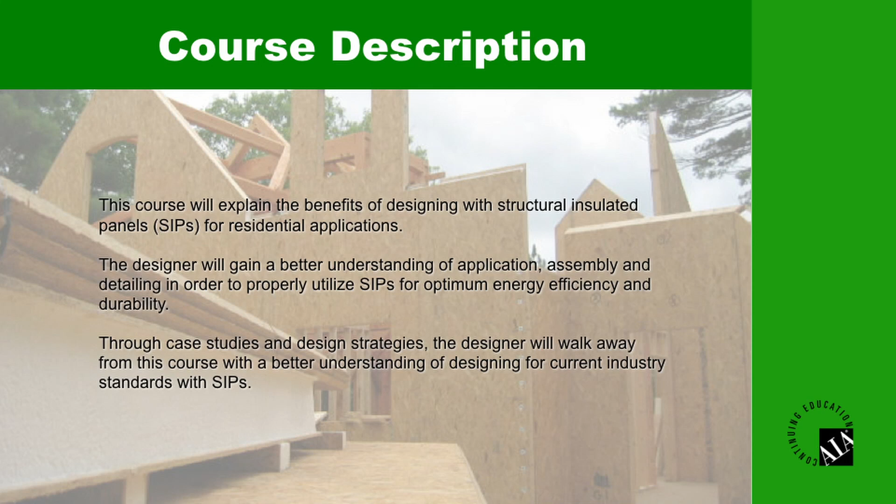The course description is basically an outline of SIPs, how they're used, what is a SIP, and how a designer can gain a better understanding of the utilization of SIPs, some of the detailing that goes into it, how they are used in assemblies, and how we use SIPs to provide optimal energy efficiency. And of course, we'll talk about durability, one of the factors in SIPs that's very important when we make a very tight envelope. We also want to look at the building science and the durability aspects of a structural insulated panel envelope. We'll walk through a couple of case studies, look at some design strategies, and along the way we'll throw some words of wisdom your way to hopefully make you a better architect or designer as it relates to SIPs.

At the completion of this course, we would like to think that you will be able to describe and define what a structural insulated panel is and how it can be used in residential applications, understand the energy efficiency aspects, the strategies that are used in order to get maximum efficiency when using a SIP, also be able to illustrate and understand the design and engineering methods used to work with the overall design methods of building with SIPs, and of course list some of the current industry assembly standards.

The course outline is as follows. Roughly, we're going to talk about the basics of SIPs, what a SIP really is and what makes up a structural insulated panel. We'll go through some various applications. We're going to talk quite a bit about the energy efficiency and the green building aspect of a SIP. Then we'll break out into designing with SIPs and the engineering of SIPs and some of the tools that we use to better help understand the engineering of working with SIPs through a design. We'll talk about SIP manufacturing, and then we'll go into SIP construction as well.

So what is a SIP? Well, we hear that a lot. What exactly is a structural insulated panel? It's pretty simple. It's a composite structure made up of basically 3 elements. It's going to be a foam core.

The foam core in the industry, in North America, is predominantly expanded polystyrene, or known as EPS. Some people refer to it as the white board, also known as bead board. It comes in a variety of densities, but EPS is the standard. Next is XPS, or extruded polystyrene, most often known as styrofoam. It's typically colored, could be green, pink, or blue foam, and has a slightly higher density in terms of its core foam density. Lastly, it could be made up of polyurethane.

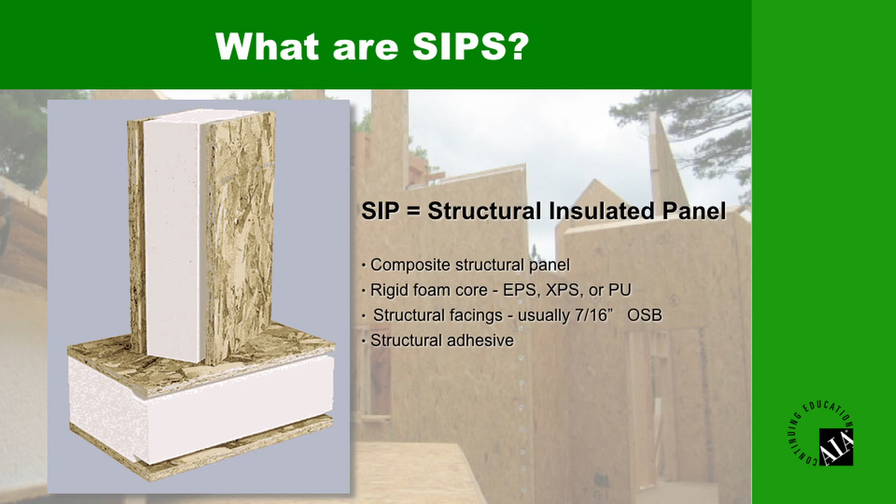So now that you understand basically what a SIP is, where did they come from? Originally they were developed back in the laboratories of Madison, Wisconsin. The Forest Products Laboratory first developed these back in the 1930s, and they referred to them as stress skin panels. The reason was looking at the use of our nation's most abundant natural resource, wood, and the concern was: is there a better methodology that allows improved efficiency when using wood?

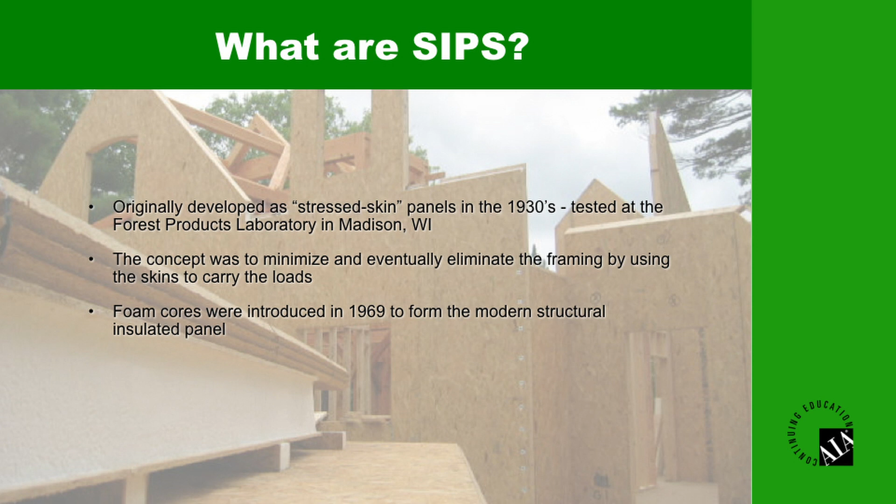They came up with things like sheathing, plywood sheathing, and now the oriented strand board. That material, when utilized in a stress skin panel as it was referred to back then, could be laminated and was shown or proven to have great strength in carrying loads. Today, the foam cores, which were introduced in the late 60s, now make up the modern structural insulated panel as we know it today.

So this is what we have when we look at the SIPs of today. We have the rigid foam core, we have a 7/16 OSB skin - though let's not say it's always going to be 7/16, we can vary from that, you can go to a greater thickness and achieve even greater structural load carrying capabilities. Then you have the structural adhesive, which bonds the core to the skin of the panel and makes it one solid composite panel.

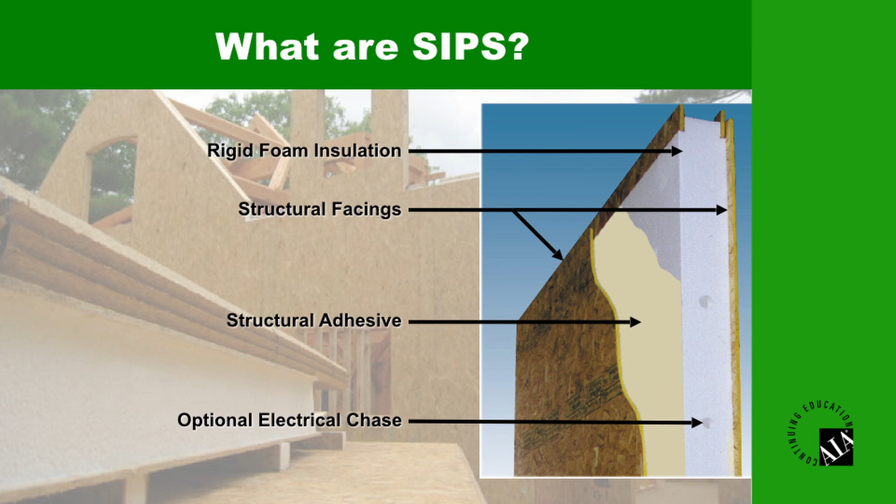And lastly, we have optional electrical chases. These chases are included in the core of the panel by many manufacturers, and they do this to allow a much quicker and simpler methodology when it comes to rough-in wiring of the SIPs.

The standard structural insulated panel does in fact use oriented strand board, but that doesn't mean it's the only panel out there. You have other options. One found quite frequently is a metal skin panel. Predominantly the metal skin panel is used in the refrigeration industry. It is not one that is predominantly used for carrying gravity loads - it's typically a cladding attached to some type of steel structure. It's much more commonly used in commercial structures.

It's very common in Europe. In the US, predominantly the only place you'll see it is in warehouses, refrigerator warehouses, or refrigerated freezer commercial spaces.

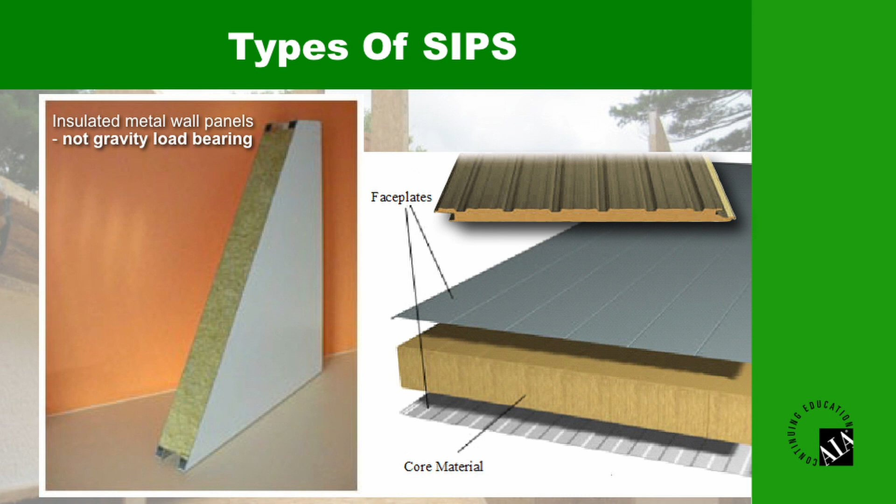Other types of skins include cementitious skins. In this case, we have a cement skin laminated to either side. This skin has both pros and cons. Pros, of course, is that it is not wood, so it doesn't have any moisture concerns whatsoever, or perhaps termite concerns. Also, those attributes could be applied to metal skins as well.

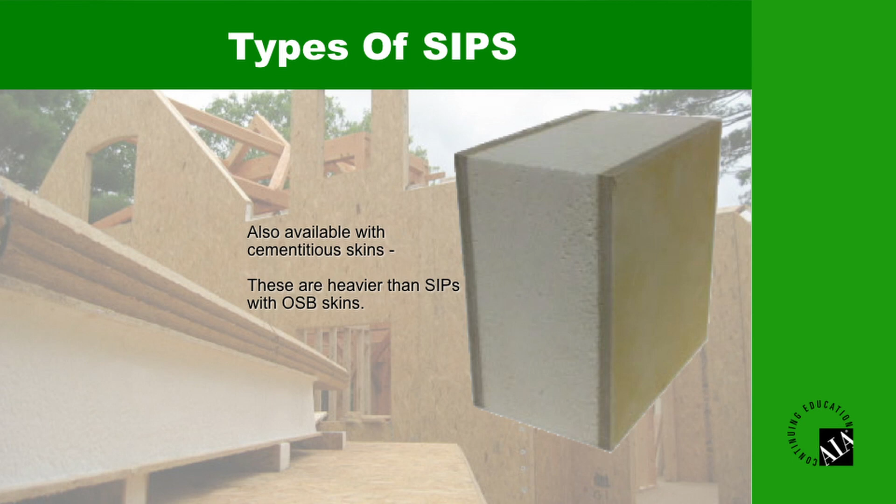But the disadvantages are: one, it doesn't have nearly as much code or testing approval. It's very heavy, as well as more difficult to fabricate and work with in the field. Also, the largest skin provided in the market today is typically going to be only up to about 4 by 10 feet. So it knocks you out of the ability to design using jumbo panels, the panels that cover a lot of area very quickly, which is one of the things in speed of installation we enjoy when using jumbo panels.

When we look at SIPs, we are looking at a foam core panel that's laminated. We are not referring to a SIP as one that is prefabricated or has a stud wall that has been pre-insulated - that's not a SIP. SIPs do, however, replace traditional stud walls. They are structural by nature, so therefore there are no studs. Think of it as nothing but a foam core panel carrying all your gravity loads around the entirety, typically, of the exterior envelope. They provide a much higher R-value, and they are substantially stronger than traditionally stick-built walls.

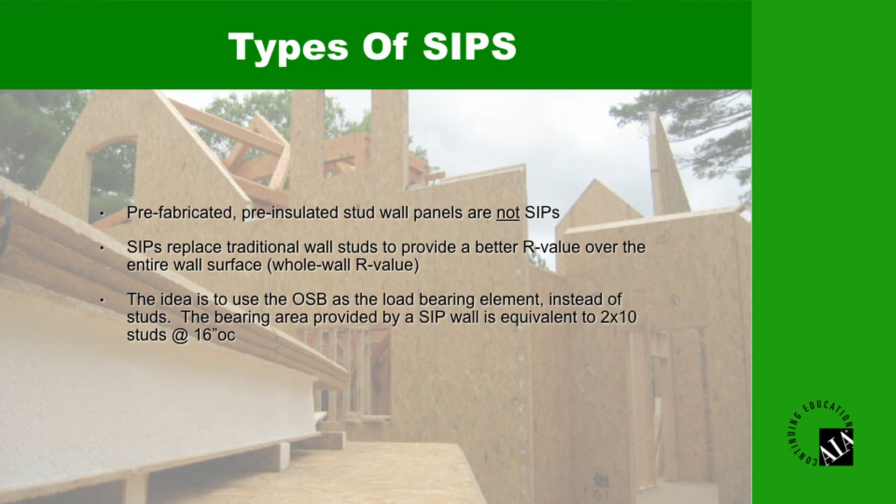The idea is using OSB as the load-bearing element - not necessarily load-carrying, but load-bearing - the equivalent of a 2 by 10 stud wall, 16 inches on center.

Let's talk about some SIP details. This is a critical moment because we need to fully understand that as a designer, you have a number of options when it comes to in-plane joint configurations or in-plane joint details.

Now what we have is an assembly, whether it be wall or roof, where the foam core is not interrupted. Therefore, we have minimal thermal bridging. When using this type of detail, the panel is doing all the work, handling all the transverse loads without the benefit of any lumber being used at the spline.

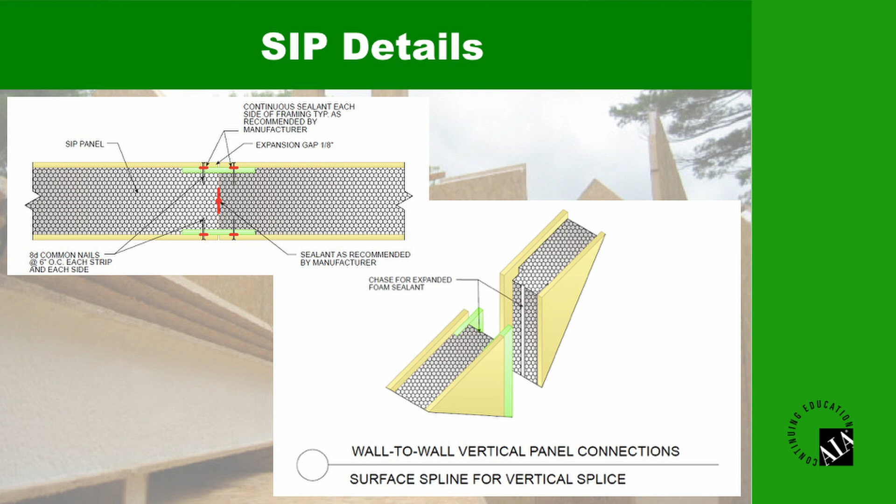Once the panels come together in the field, they are sealed, whether it be some type of a mastic or a foam, which we'll talk about a little bit later. In addition, SIP tape may be applied to the warm side of the assembly as code requires or as climatic conditions require.

This detail is very similar to the previous one, the surface spline, but in this case it's referred to as the block spline. If we think about that little section right at the joint of the panel, instead of providing two separate 7/16 OSB splines, we take those two splines and laminate them to a little block of foam, creating what might be referred to as a mini SIP.

That SIP, also known as a block spline or in some cases a super spline, slides into the edge of each panel, and when it comes together and is sealed, you have in essence the exact same configuration of strength and thermal performance that you would see in the surface spline.

The reason one might use one over the other is strictly a case of manufacturing processes. Manufacturers may have equipment that better allows them to use block splines, or routing tools that better allow them to efficiently create panel edge treatments that receive single or double surface splines. It's just a manufacturing situation, that's not the important point.

The important point is that this type of joint allows the panel to do all the work, and it minimizes the thermal bridging within the panel.

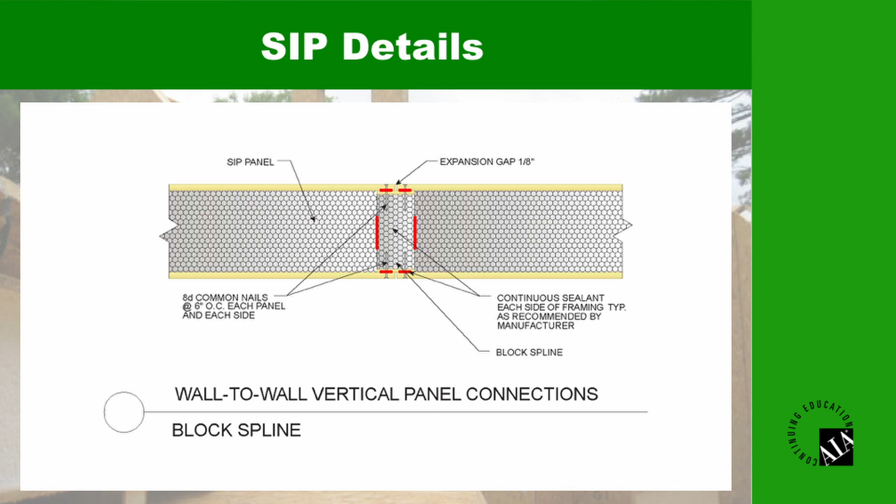On this detail, you'll see that the foam from the panel on the left and the foam on the panel on the right do not come together. Instead, we are dealing with a thermal bridge. That thermal bridge is double-dimensional lumber. The advantage of this double-dimensional lumber is that it increases the span capacity of a panel for a given thickness.

If we have a span condition where we need to increase its load carrying capacity, we have two options. We can go with a thicker panel, because thicker panels span greater distances, or we can change the joint configuration so that it has lumber in it, and that lumber adds to the span capacity of that panel.

After this lumber goes together, you still have to seal it. You can very quickly see that the joint in the panels and the joint in the lumber actually line up, so we are relying on that continuous sealant right at that joint to maintain its airtight boundary.

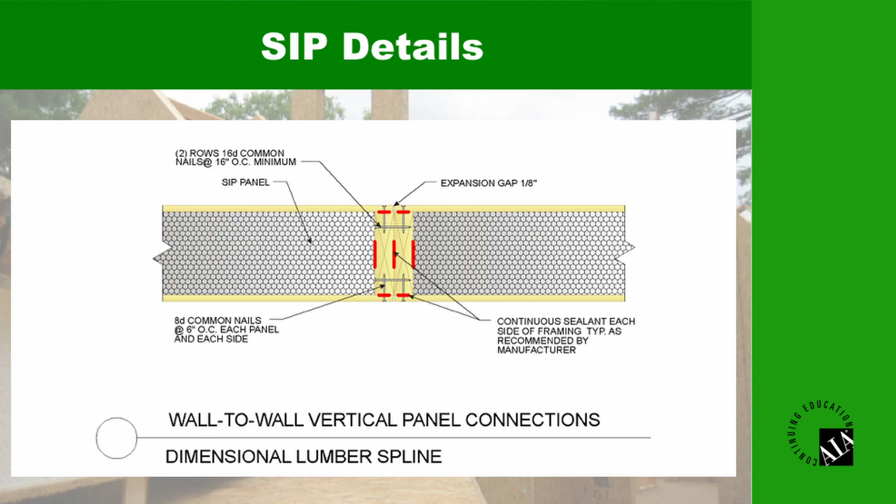This is also where we might employ SIP tape, a tape that ensures an airtight boundary or an air boundary on the warm side of the structure, acting as a vapor barrier.

In this plan view detail, we have two panels coming together at a corner, a 90-degree corner. One panel is long, one is short. This is a standard lapped connection, and the panels are brought together and fastened with a typical panel screw, perhaps at 24 inches on center as it comes up the wall corner.

Those screws penetrate through the long panel, or the top panel in this diagram, and into the lumber that is in the edge of the lower panel. The joint that is critical in terms of air sealing, of course, is the interface between the two panels, where sealant needs to be applied continuously so that we don't get any air coming through that corner joint.

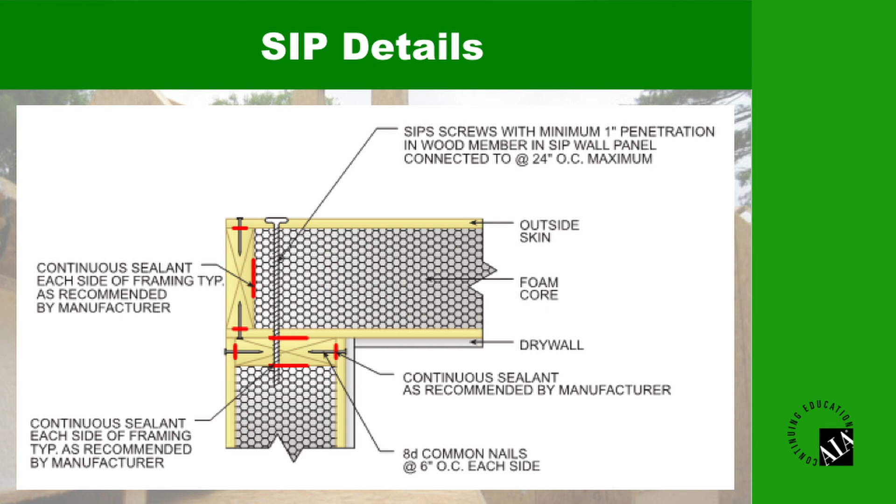As a designer, of course, you want to put windows and doors into the wall assembly. When using structural insulated panels, this is not only easy to do, in some cases it's really fun to do, because we don't always need to install separate structural headers.

The panels are structural and therefore they can act in some cases as their own header. If we don't have a point load, and the windows or doors are not too wide or too close to the top of the panel, this allows us to do exactly what you see in the photo, which is to put single dimensional lumber around the perimeter of the opening.

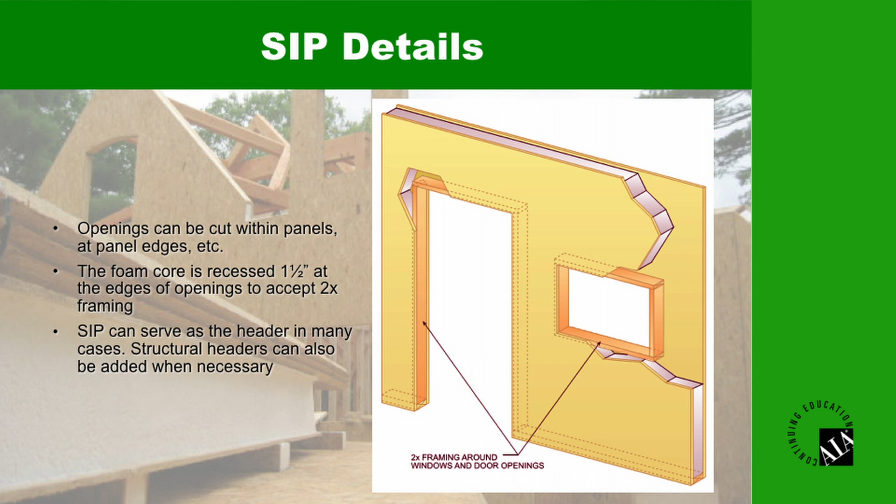This is done by recessing the foam 1.5 inches. That foam relief then allows the dimensional lumber to be sealed in place between the skins and nailed off on both sides. Fastening is typically done with standard nails or staples on 6 inches on center.

This next detail shows a typical hanging or hung floor system between a first and second floor. In this case, a top mount floor hanger goes over the top of the first floor wall. The floor joists stay inside the insulating envelope. The 3/4 inch tongue and groove floor sheathing goes over both the floor joist and the first floor wall panels. We increase our diaphragm strength tremendously by doing this, and then we stack the second floor wall panels directly on top of that. All of the red marks on the detailed drawings indicate sealant to maintain airtight integrity.

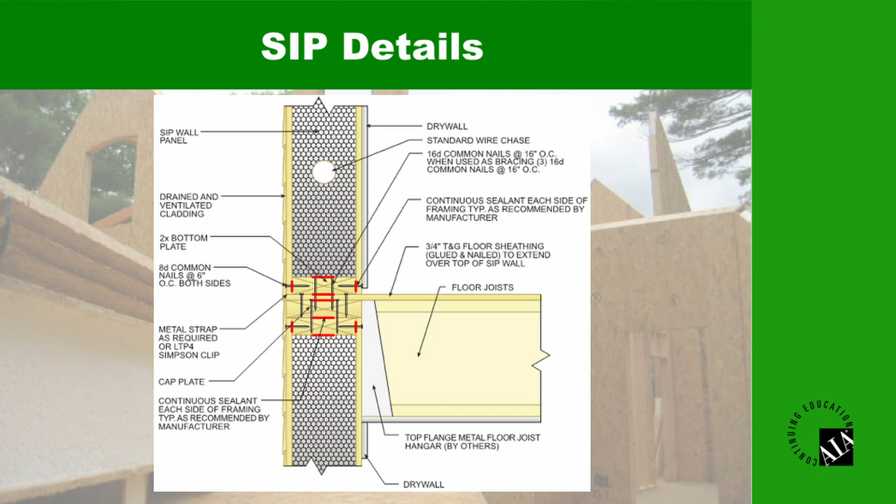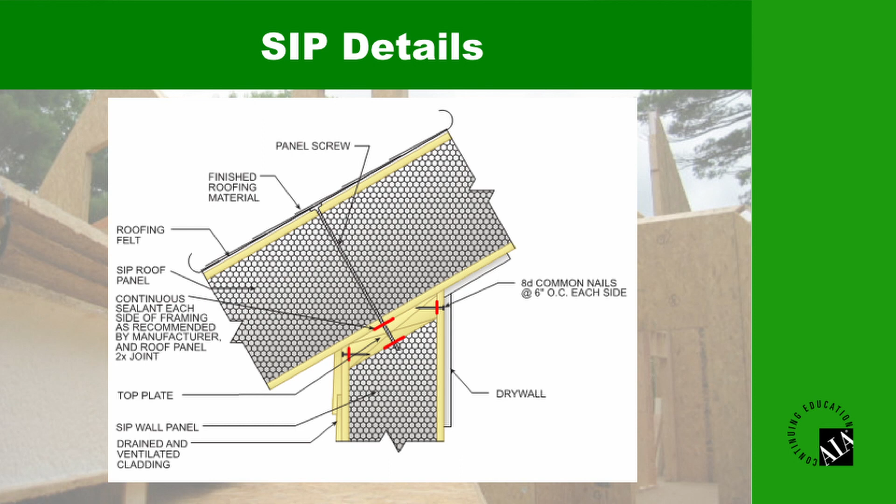Here's the detail of the connection between roof and wall. In this case, the wall panel has been fabricated to the angle which matches the roof pitch. The double dimensional lumber has been beveled on both sides, slipping into the top of the wall panel. Sealant is applied to the top of that wall panel before the roof panel drops into place, and then a panel screw extends through the roof panel and penetrates fully into the dimensional lumber that is the top plate of the wall panel below.

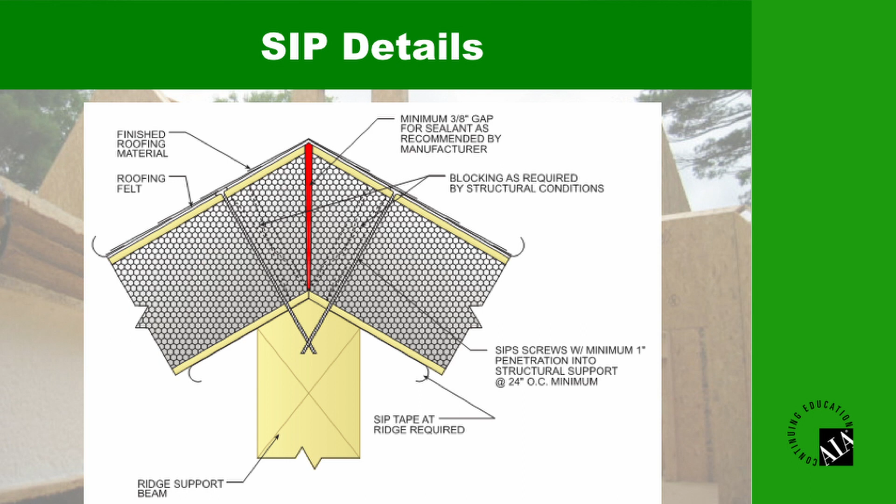In many structures, you might find yourself very comfortable using SIPs on the walls but not on the roof, or for some reason it might not work in a roof application. That's quite all right. Using SIP for walls and conventional trusses for the roof is commonly done.

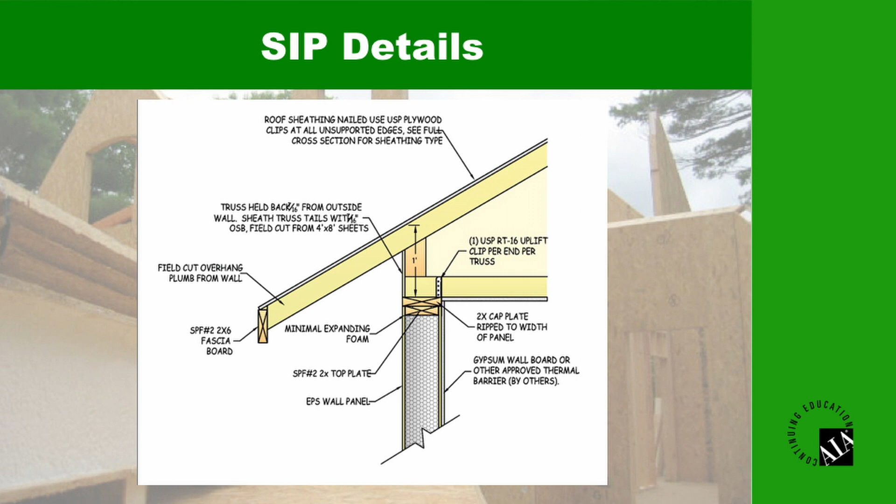This detail shows clearly that the top of the wall panel has a top plate, shown as a 2x top plate. On top of that, there's a 2x ripped cap plate, sometimes called a shim plate. The ripped shim or cap plate provides full bearing for the truss to sit on top of the panel, and this actually increases the load carrying capacity of the wall panel below. Here you'll see we've got a 1 foot heel height in the truss design, giving us a full height of insulation in that upper truss area, much like you'd see with any conventional insulated truss package.

I've spoken about SIP screws on a number of occasions. These screws come in lengths anywhere from 6 inches up to 16 inches long. They're used to fasten panels either to a frame, to themselves, or to ridge beams or other structural members. The points on these screws can be a thread point for wood, a self-tapping light-duty penetrating screw, or in some cases a heavy-duty point which will penetrate into up to 3/16 mild steel. So if you're on a metal building and your roof panel needs to be attached, this heavy-duty drill point screw will allow you to do that.

The screws are 1/4-inch shank steel, tempered steel. They have a pan head that allows them to pull in tight and be flush with the outside of the OSB skin, so it doesn't transmit through any siding, shingles, or anything of that nature.

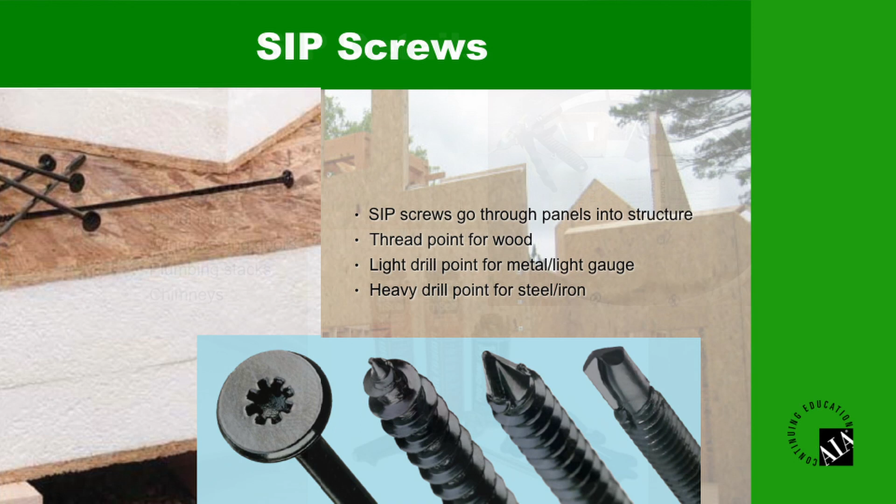I've also spoken about in SIP details the need for sealing. Sealing is absolutely critical. We want to make our buildings airtight. Buildings need to be airtight in order to be energy efficient. It's completely misunderstood when somebody says buildings can't be too tight, they have to breathe. That's incorrect. Buildings should be exceedingly tight, and then designed to be able to dry. Buildings don't breathe, they dry. Moisture control in energy efficient buildings is incredibly important.

In order to make buildings airtight, we use a combination of expanding foams, mastics, or other sealants including gaskets or sill seal. In this picture you'll see 2-part foam in the upper right hand corner, where we use a polyol and an ISO, which together combine to create polyurethane. The single component foams down below are gun applied. These are used anywhere air might leak through the assembly: around chimney stacks, plumbing stacks, windows, doors, joints, you name it. If air can get through, injecting foam into the joint is a great way to improve energy efficiency of the system.

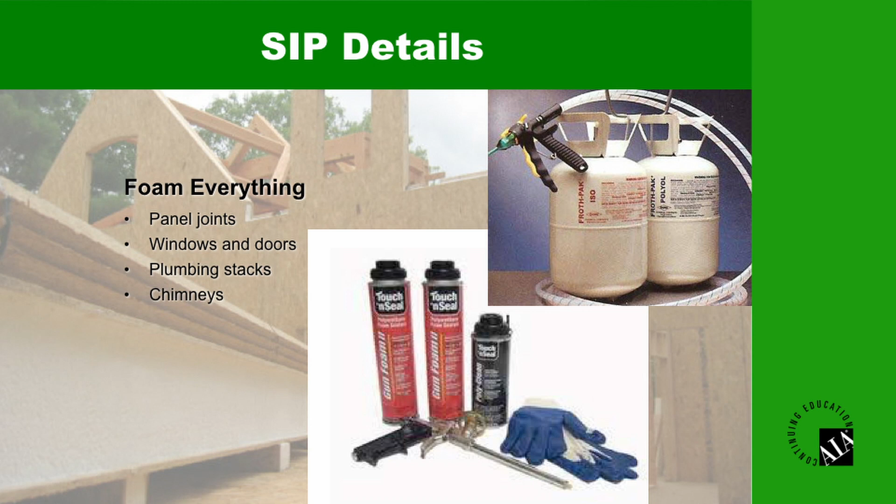There's a lot of misinformation out there about energy performance and how panels truly perform, especially when one only looks at a rated R value. The rated R value only tells half the story. The other half of the story is air tightness.

Oak Ridge National Labs, in conjunction with the Structural Insulated Panel Association, did some tests looking at whole wall R values of panels compared to conventionally framed systems. One big part of this test had to do with the thermal bridging that is inherent in conventionally framed systems. When we have a 2x4 or 2x6 stud wall with studs spaced 16 or 24 inches on center, we have a framing factor, or thermal bridge factor, meaning upwards of 20 to 25% of the wall might be solid lumber.

In a SIP wall, the whole wall R value performs substantially better. So even though you might have a rating of R14, a comparable 2x6 stud wall that has an R19 rating with fiberglass in it doesn't perform that way. That's why there's a great deal of misunderstanding about what the true R value is when we compare SIPs to conventionally framed wall assemblies.

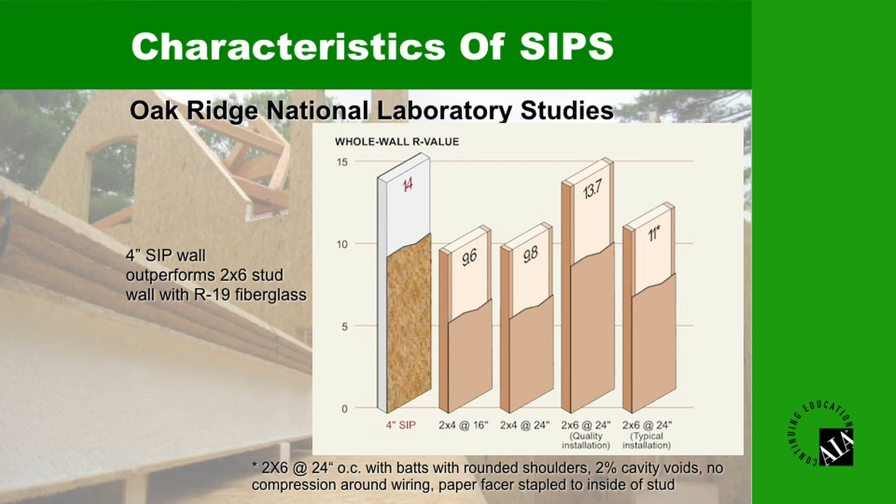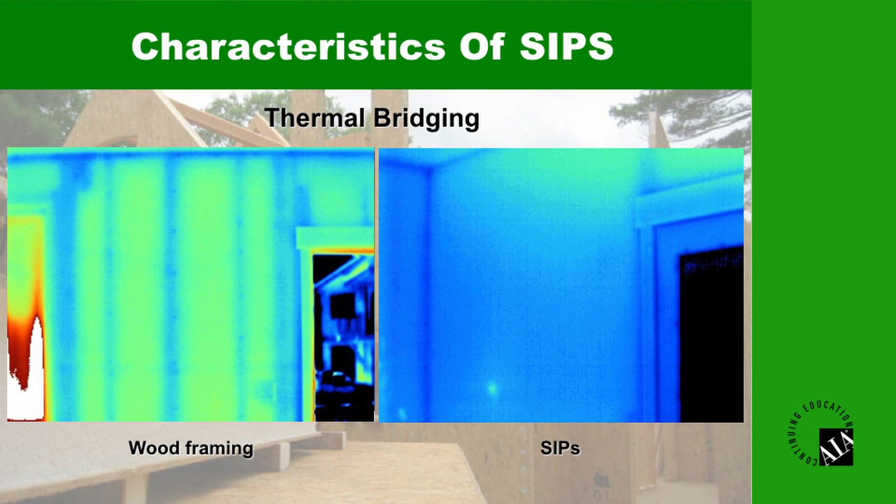I talked a lot about thermal bridging, and when we look at thermography or thermal imaging from a thermal camera, you can clearly see what a thermal bridge looks like. It's the dark lines on the left in conventional wood framing. If we look at the SIP on the right, you'll see that homogeneous SIP core, especially when uninterrupted by maintaining a design that allows us to use the surface spline, we get continuous foam throughout the entire wall or roof assembly, and that's a good thing.

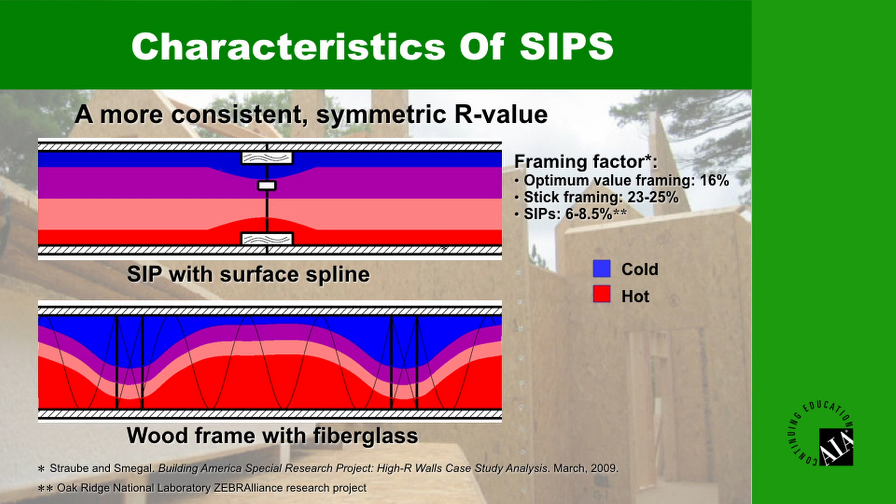If we want to get super geeky about the statistics of thermal bridging, we could put some of our analysis through a THERM analysis or something that looks at the transfer of heat through the assembly, and you can see, just as I pointed out at the beginning of this presentation, the surface spline does not allow for those huge variations in the flow of energy from interior to exterior skin like it does where thermal bridging occurs at studs, as you see at the bottom of the detail.

Characteristics of SIPs: I've talked a lot about air tightness, and it's because I truly enjoy seeing houses perform very well, and they do that by virtue of being airtight. Houses need to be airtight, and SIP houses can be made very, very airtight when tested with a HERS rater or a home energy rater using the simple blower door test.

This blower door test can be used not just to verify how tight the house is, but just as importantly, to look at the quality control of the installation and also to verify durability. If we have uncontrolled air leaks, we penalize ourselves not only in energy efficiency, but we may have air leakage that could result in condensation, which results in moisture, which results in headaches none of us want. So look at the blower door test and the test for air tightness, not just for performance, but also for quality control as well as durability.

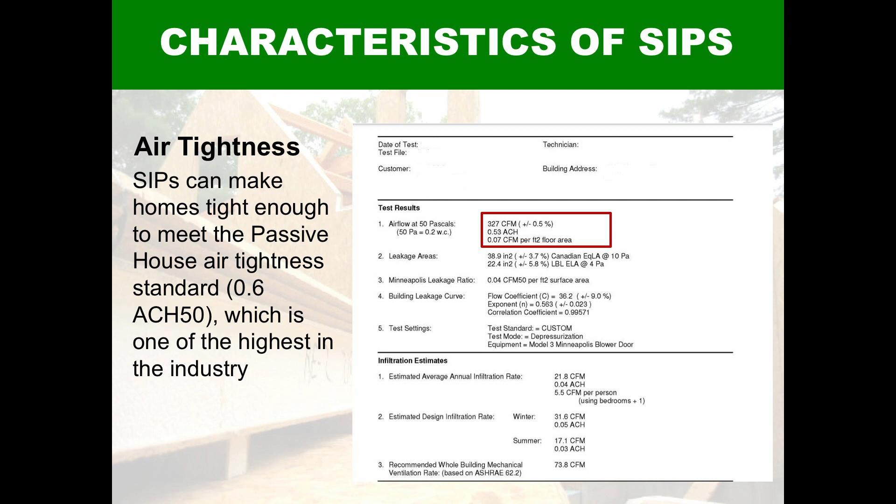A SIP house can very easily achieve high levels of air tightness. In fact, having built a number of passive houses myself, I can attest to the fact that a SIP envelope, when properly installed and sealed, can quite easily achieve the standard of 0.6 air changes at 50 pascals of pressure when a HERS rater puts it through a full blower door test.

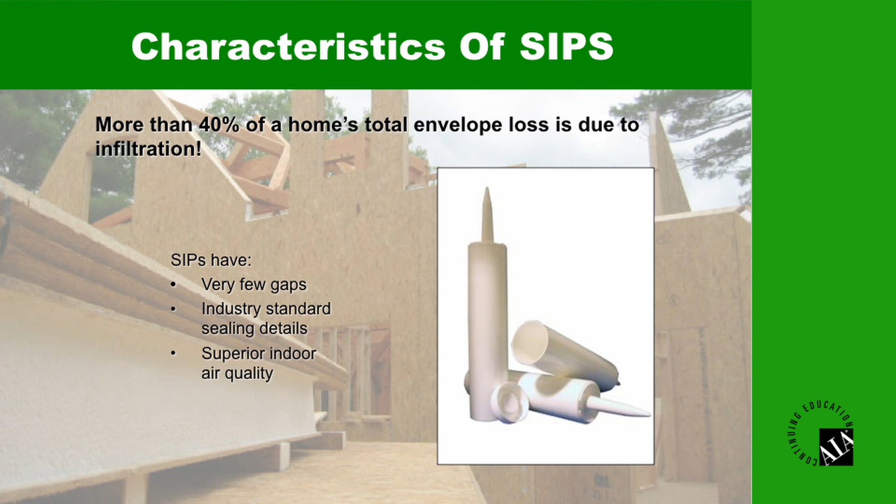40% of the total loss of energy in the home's envelope. That's incredibly important. SIPs have fewer gaps, especially when we use larger panels with good design, and with the use of a surface spline, we have the ability to put in joints that are easy to make airtight. So you can then achieve better indoor air quality, better energy performance overall, if we maintain that air tightness that SIPs easily provide. SIPs are ENERGY STAR compliant.

They are in fact recognized by ENERGY STAR, and if you read the small print, they'll even tell you you don't actually have to do a blower door test, because the folks at the ENERGY STAR program, having tested enough SIP houses, recognize the fact that they always pass the blower door test. I, however, would encourage you not to read that small print and say, gee, I can get away with not doing a blower door test.

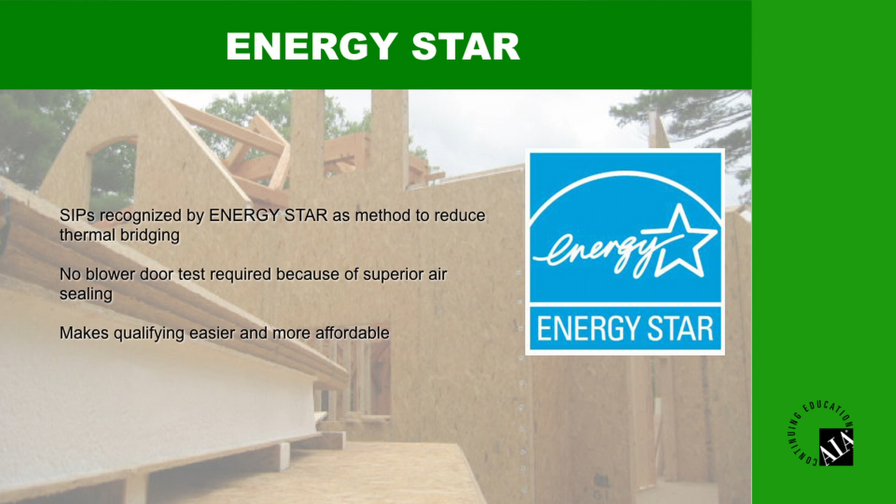I would go back to what I said before, which is do a blower door test on every single house, and do it not just for verifying its performance, but just as importantly, verifying quality control as well as durability of the house. The rater, or the HERS rater, who does the blower door test on structures, will provide a score for the structure, and this score uses the HERS index.

The HERS index is basically like golf. The lower the score, the better you're doing. A 0 score means that you are zero energy, or net zero compliant. It means that you make as much energy as you use. In a modern day house, this means you must have some type of energy producing equipment. There must be some type of photovoltaic, wind, or water energy producing equipment that allows you to get to that point.

About as low as you can get without any of this equipment would be a HERS score of about 30 to 35. Somewhere in that range is about as low as you can possibly go without producing your own equipment. It's very tough to get that low. A standard new house being built to the code minimum standard will score a 100. So everything below that is an improvement beyond the model energy code.

ResNet, the Residential Energy Services Network, are the folks that certify HERS raters, referred to just as raters. And these raters will do the blower door test and then do the calculations using REM rate software to determine how well the house will perform.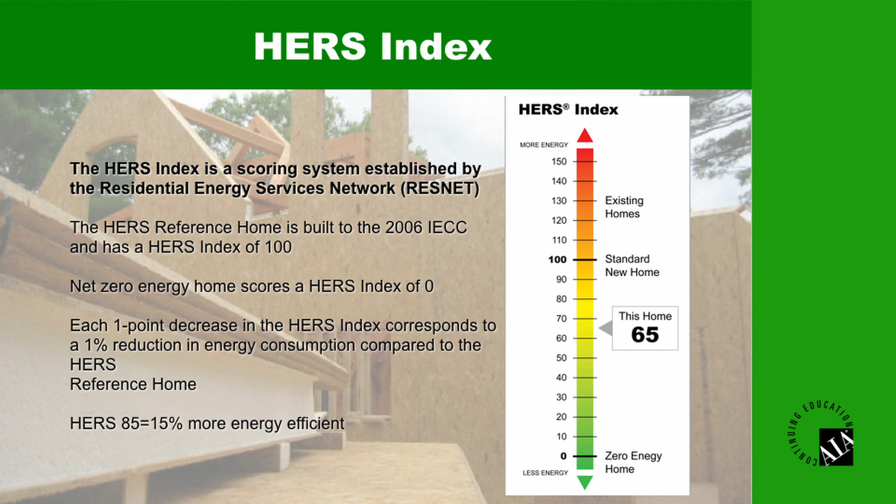This can be done pre-construction. It can be done mid-construction, when they do their first blower door test, which is when the first blower door test should be done so that we can make corrections in the envelope before the finishes are applied. And then ultimately the rater typically would come in and do a final inspection at close of, or at certificate of occupancy, to verify that everybody has done what they're supposed to do and we still have a good tight envelope. Continuing with characteristics of SIPs.

Let's talk about SIP R values. If we look at this chart, you'll see that EPS, or expanded polystyrene, in a 4.5-inch panel has an R value of about 14.4, whereas the XPS is about 19.5 and the polyurethane is 21.7. The confusing part about this is that if we look at the bottom, you'll see that R values are based on a mean temperature of 75 degrees. This is what the Federal Trade Commission requires us to market products at when they are insulation. So therefore, all products are rated at 75 degrees.

The interesting thing about most foams is as the temperature drops, the R value actually increases. They have an increased resistance to the flow of thermal energy when the temperature differential is increased, i.e. the outside temperature drops more and more. So this is why you will see R values in some cases much different than you see on these charts, because the manufacturers are looking at whole wall R values, which we talked about before, or the fact that you actually get an improved performance when we start looking at cold climates.

R values don't tell the whole story. You really need to consider air tightness as part of the package as well. This chart will show you that you can get R values very high, all the way up to 45.9, 58.3, and that's just when you're looking at 75 degrees Fahrenheit, which is about the one temperature where we actually don't need insulation.

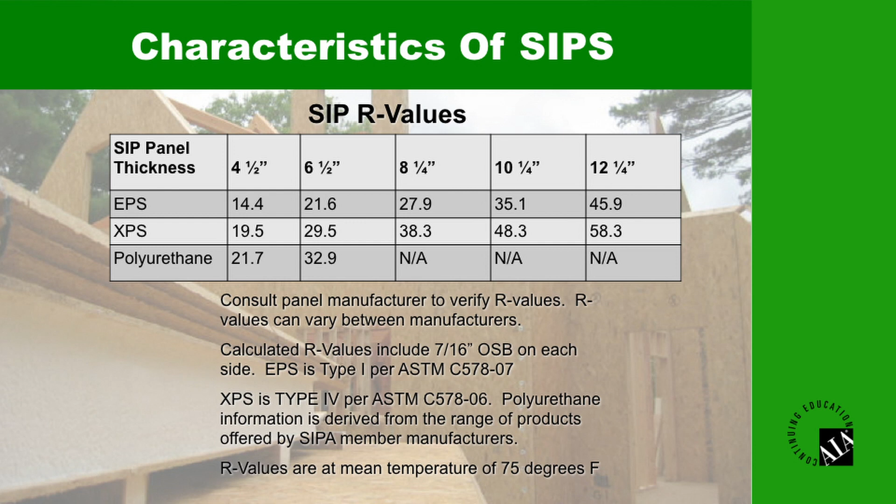When you're designing with any of the green building programs, the use of SIPS can benefit you greatly. Whether it be LEED, NAHB Green Building Program, Earthcraft, or any of the others, many of the attributes of SIPS will benefit you in your application for these programs.

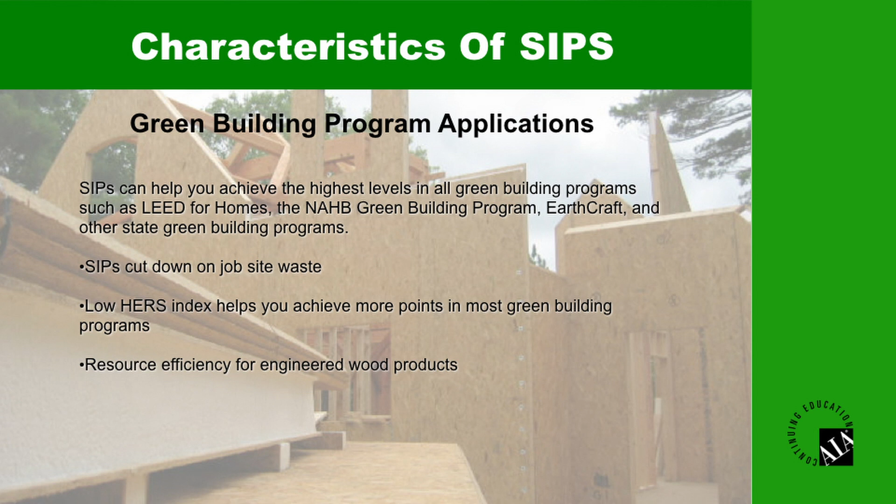They're going to cut down on job site waste. The lower HERS index score will allow for a greater amount of points in many cases. Also, you get a lot of resource efficiency for using engineered wood products, and some of the recyclability aspects of SIPS, as well as low VOC requirements. There's a number of attributes of SIPS that will help you in the point race, if you will.

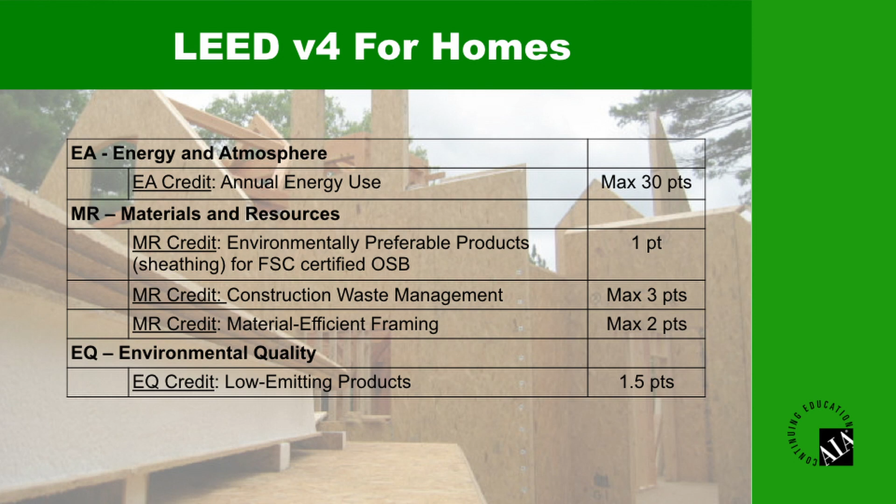Specifically, if we look at LEED v4 for homes, you're going to see that we have a number of points for both annual energy use, a number of opportunities in materials and resource, and down in environmental quality, where we talk about low emitting products. Again, that's the low VOC, provides a number of points as you move forward.

If we look at the life cycle analysis of SIPS, we see a number of benefits. When comparing ourselves to traditional stick frame homes, the amount of energy invested versus that which is saved is about 10 times the amount. So we see a huge gain in energy efficiency over years, and this provides a reduction in global warming potential with the equivalent CO2 emissions produced, as well as we see the energy payback period somewhere in the neighborhood of 5.1 years.

This changes depending upon where in the country you're looking at. As we are in southern climates, it's a longer time frame for payback. If we go into the colder climates, the payback is much quicker, because the energy savings in the colder climates means we can get a payback much quicker. And recapturing greenhouse gas emissions occurs within 3.8 years. The emissions used during the production of those panels is then saved after 3.8 years because of the reduction in energy usage due to the efficiency of the SIP envelope.

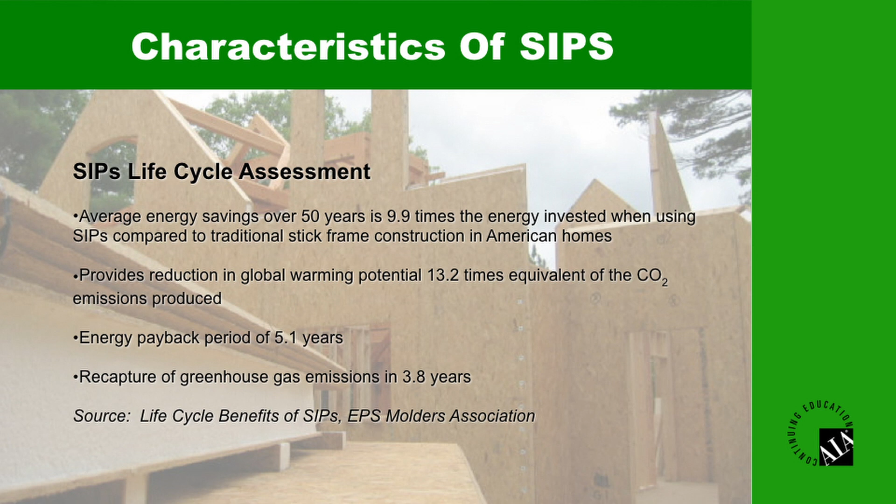Within residential energy code compliance, with a number of states having already adopted 2012 and now a number taking on 2015, we have to look at the model energy code or compliance with the energy code. Most people are only familiar with code compliance as it relates to the prescriptive method, meaning they know the walls have to be RX and the roof has to be RY, whether that be a 19, 22, or 24 in the walls, or a 30, 34, or 38 in the roof. It's the prescriptive method. It's just a line in the sand that says you need to be this high in R value in order to comply.

But as I said before, R value is only half the picture, only half the story. The air tightness of a SIP envelope is why you will be much better off to use either the alternative method or the substitution method, or perhaps the performance method, which is the most advantageous in that it takes into consideration air tightness much more so than the others. The prescriptive method doesn't consider it at all, it just looks at R value. So thinking about how we are in compliance with code is a whole lot more than just looking at a number on a page that says R value.

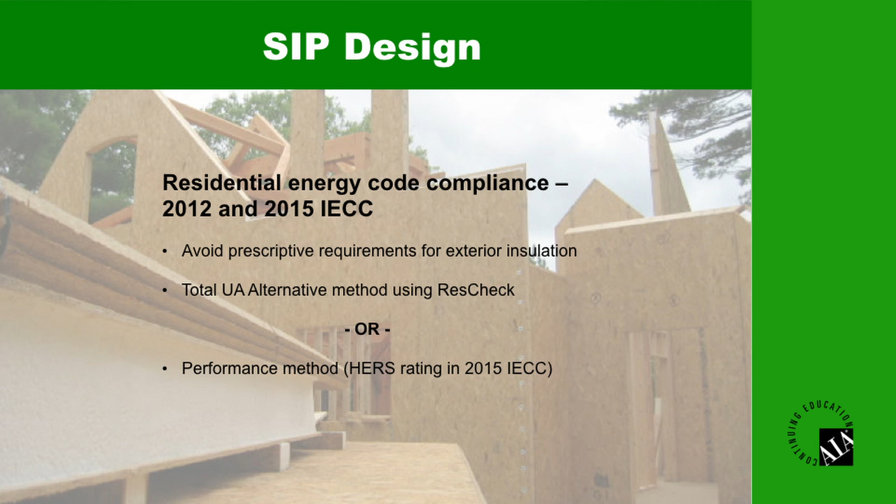Looking at the performance of the overall system is a great way to become compliant with the code, and in some cases having an R value that might not even have met it in the prescriptive method of compliance. SIPs have a phenomenal way of complying with the code in a number of ways, and using the performance method is the best bang for your buck when calculating.

Designers who are working on SIP projects will find it very useful to use the various load table charts and engineering charts that result from the testing performed by the certified labs discussed earlier. These tables, whether produced by an individual SIP manufacturer or the code report held by the Structural Insulated Panel Association, can be used to determine various capacities and capabilities of the SIP, whether it be a gravity load, a transverse load, or the axial carrying capacity of a wall. These load design charts are a tool designers will use to verify their understanding or capability of use of the various panels and orientations within the project.

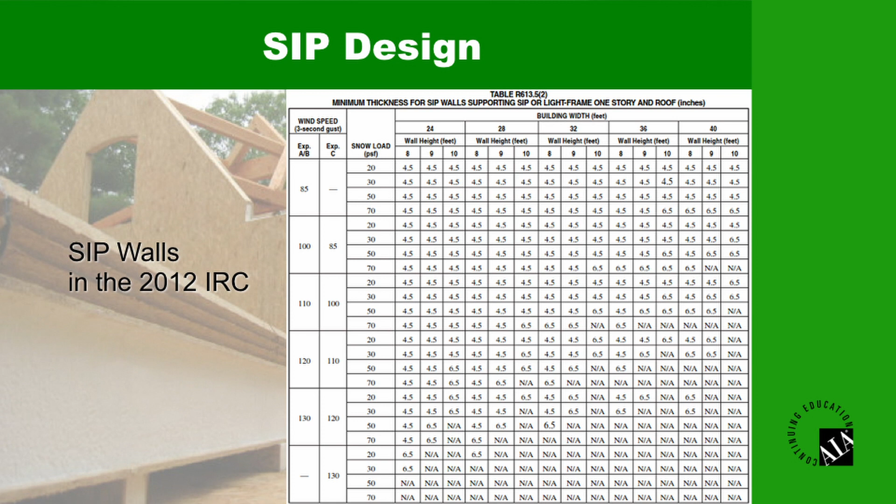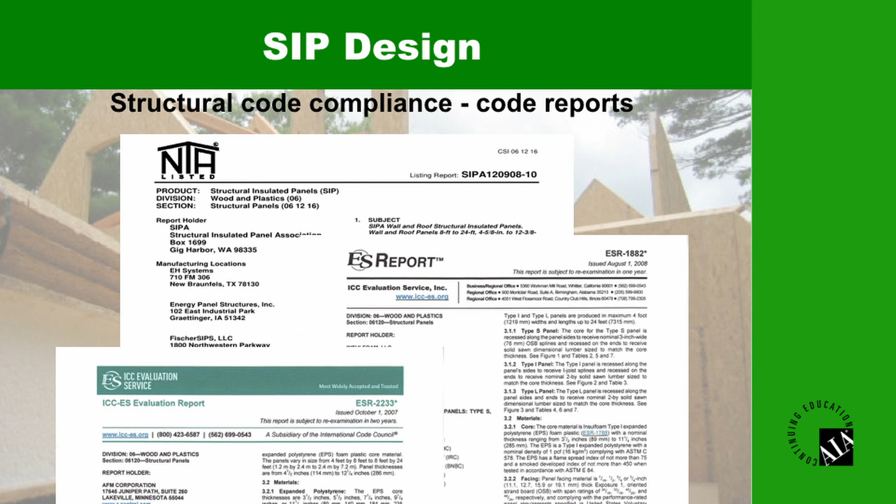Within SIP designs, we have to concern ourselves with the structural nature of the panels. This structural nature is confirmed by laboratory testing or code approval based on testing done by individual manufacturers using certified labs. These labs result in evaluation reports that provide all the information necessary to show compliance with various codes. They are available by the manufacturer you work with, and they can pass this information on to you to show full code compliance.

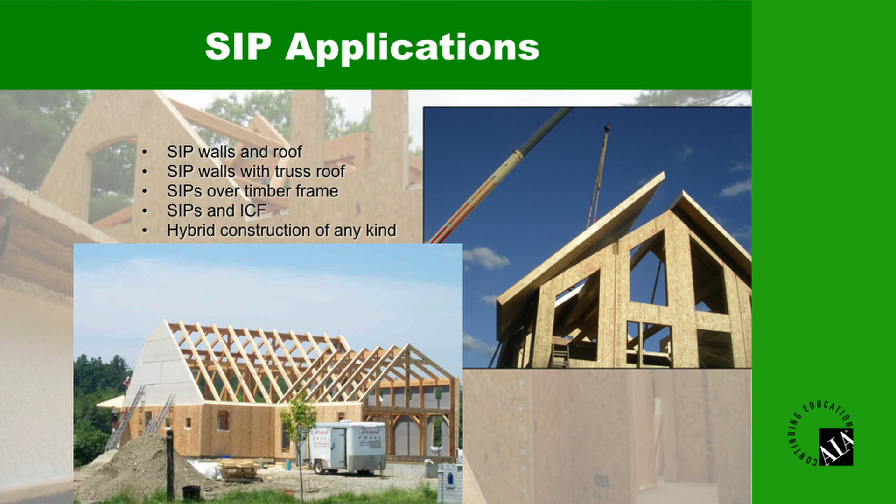SIPs don't require an all-or-none approach. It's about using them where it makes sense. If it makes sense on the walls only, use them there. If it makes sense on the roof only, use them there. You have the ability to use SIPs where they make the most sense, whether on walls or roof only. In some cases, SIPs can be used in a renovation scenario, creating a new roof or overlay that upgrades the energy efficiency of an existing house. You should talk with manufacturers to see where this best applies to your situation.

The project you're looking at right now is an 1872 historic preservation where SIP roof and walls were applied after the house was raised and put on a new foundation. The HERS score of this house was a 47, so they really knocked it out of the park in terms of energy efficiency on this project in Ohio.

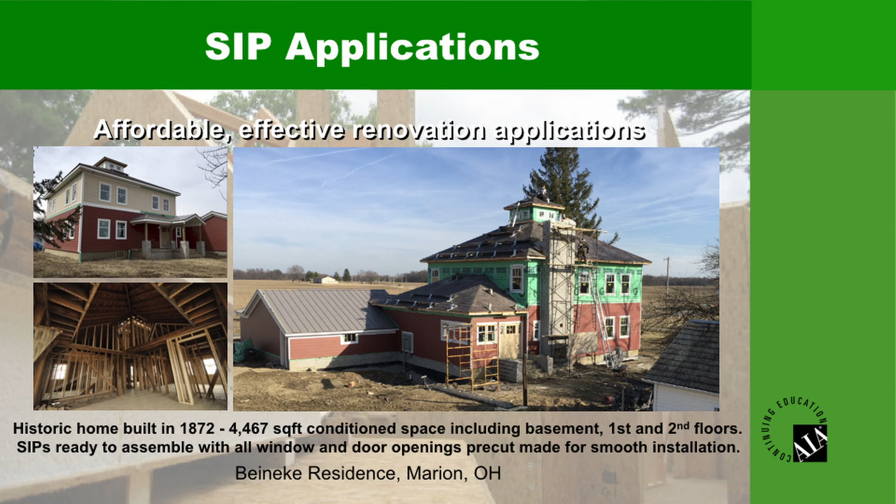The affordability market of SIPs has been growing tremendously, because it's clearly understood that the true cost of home ownership is not just principal, interest, taxes, and insurance, but also utilities. If you take a project like a Habitat for Humanity project where utility costs can be reduced substantially due to greater energy efficiency, SIPs can actually become, out of the box, a more affordable way to live because you're not dealing with a large utility bill.

These Chicago workforce housing projects utilized SIPs in a very simplistic design, but the end result provided extreme energy efficiency and exceedingly low utility costs.

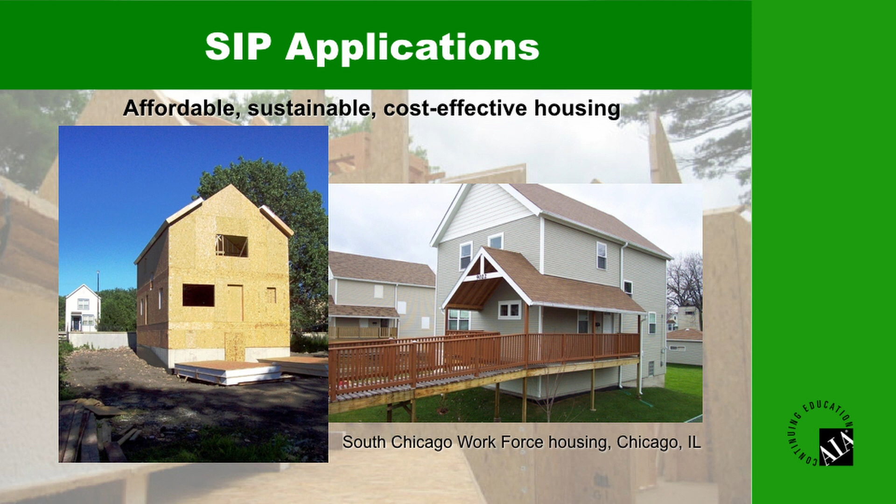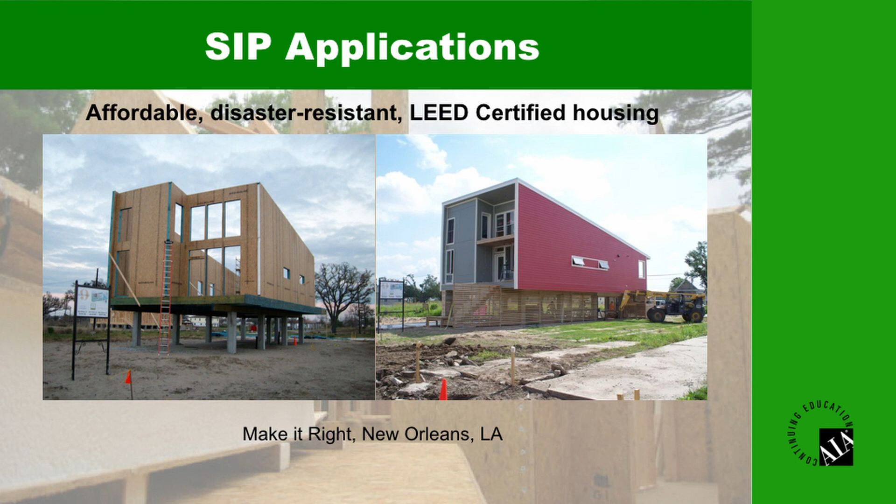If we want to talk about disaster resistance, these projects were part of the Make It Right Foundation after Hurricane Katrina down in New Orleans. These projects were all made out of SIPs, again dealing with extreme engineering and climatic conditions—high wind speeds and great exposure. In this case, the SIPs allowed us to meet the engineering requirements of the project in an area where it's very important to be able to build right on the coast.

SIPs had a huge resurgence in the timber framing community when timber framers recognized that a structural insulated panel was the ideal envelope for a timber frame. Here are a couple of projects you can see on the screen. These projects enjoy the wrap of a structural insulated panel, which provides not only additional strength to the timber frame, increasing its racking resistance, but also gives it the modern-day energy efficiency that timber frames of many years ago never seemed to enjoy.

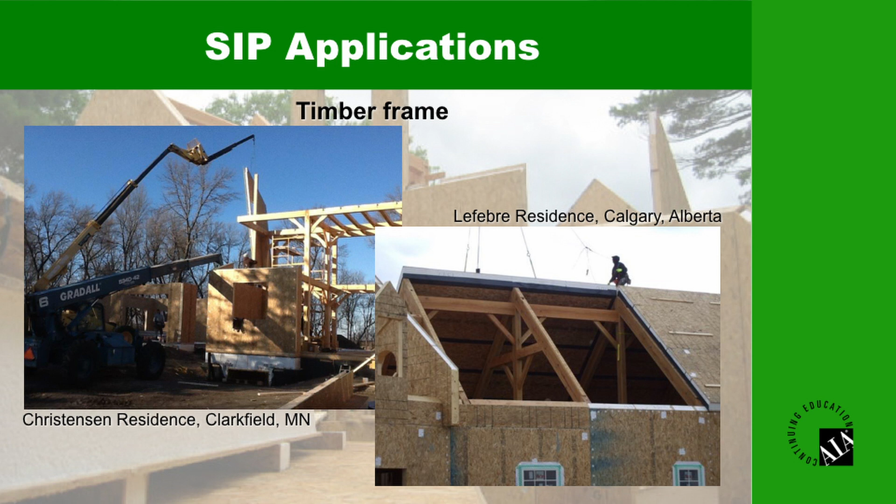One of the key elements of good SIP design is the support or structural support of the roof. I can look at this picture and tell you that the panels span from eave to ridge. There's a ridge beam as well as a midspan beam, which might be referred to as a purlin beam on either side of the roof.

This purlin beam breaks up that long span from eave to ridge, in essence putting the panel in a multi-span condition and allowing the panel to bear in multiple locations, which means the panel may not have to be as thick because it doesn't have to span as far, or does not need to put any dimensional lumber at the spline joints to supplement its capacity to span.

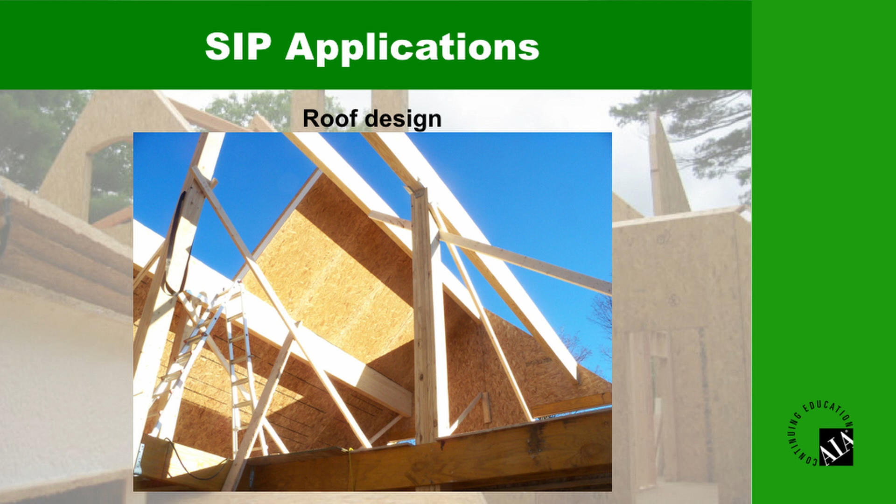If we look at these panels, we can see that they actually have the ability to span some fairly long distances. In both of these cases, the panel spans from eave to ridge, which means it's in a simple span condition. Based on the area we're building, the snow load or total load, one has to determine what thickness of panel best meets the requirements or loading such that the panel will do all the work.

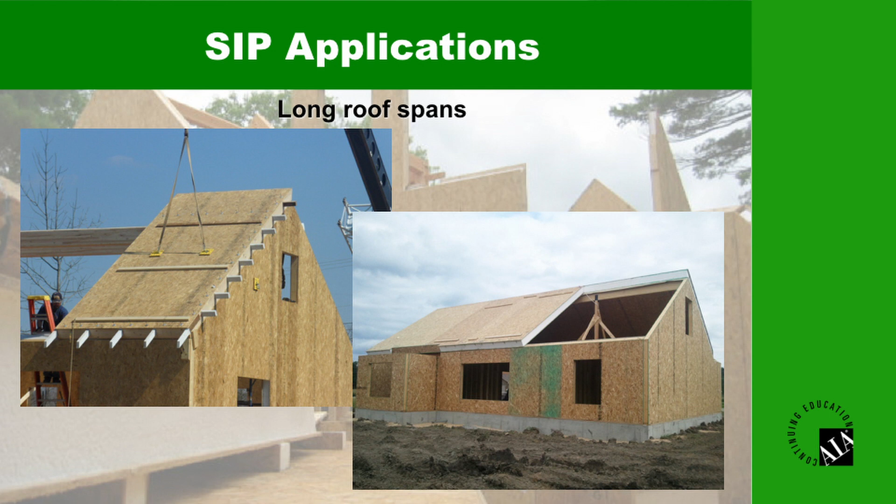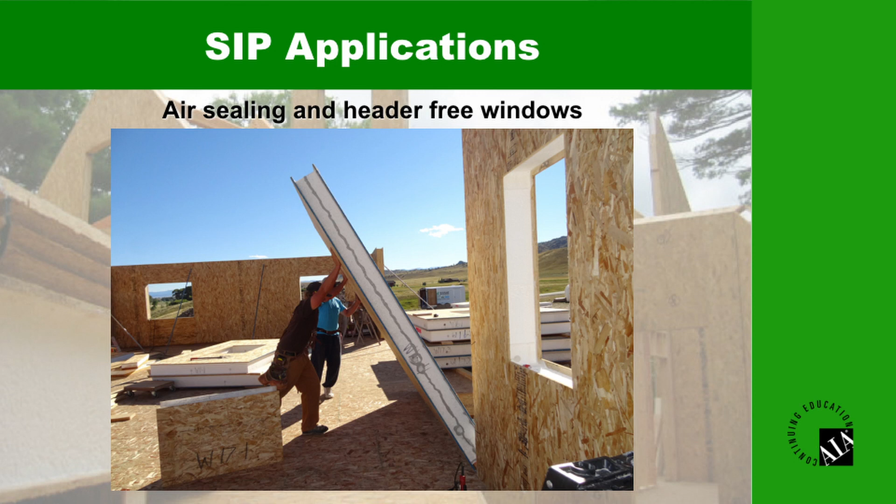All the panels are labeled. These panels were cut in the factory and sent to the job site, prefabricated, so that installation can be done very, very quickly. As a designer, you should not be concerned about the format of a SIP panel dictating how you design your project. If you have a complex design, let the design flow, let it be whatever it is that you want to design.

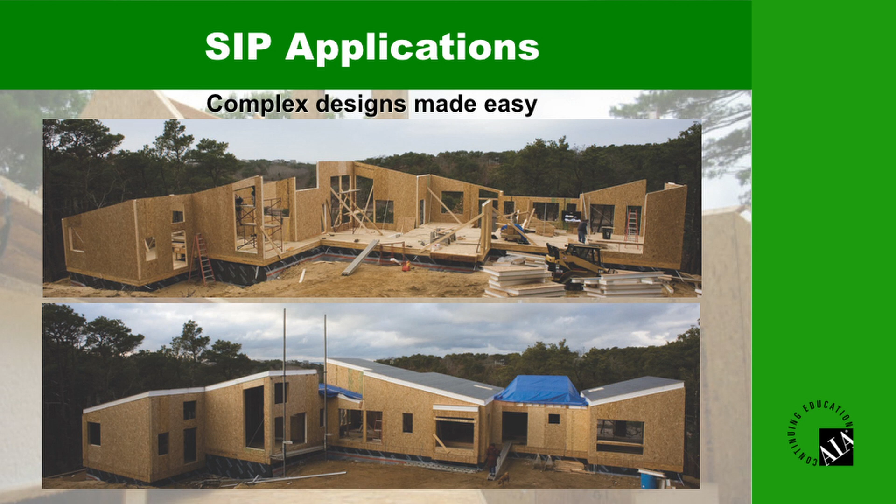Let the manufacturer and their reps work with you to coordinate the transfer of your information, in whatever format you draw, into the panel layout drawing that the manufacturers create, that ultimately allows the panels to be fabricated and shipped to the project, such that when it all fits together, it creates the design you have created before ground is even broken.

So in summary of this course, where we've spent an hour together talking about structural insulated panels, one would hope that you can describe and define what a SIP is and how it can be used in various applications, understand what the energy strategies are when working with SIPs, as well as illustrate the design and engineering methodologies used with structural insulated panels, and of course list and describe the current industry assembly standards, of which we only touched on a few. There are many more, and all of those are available through information directly from the manufacturer you're dealing with, or with the Structural Insulated Panel Association.